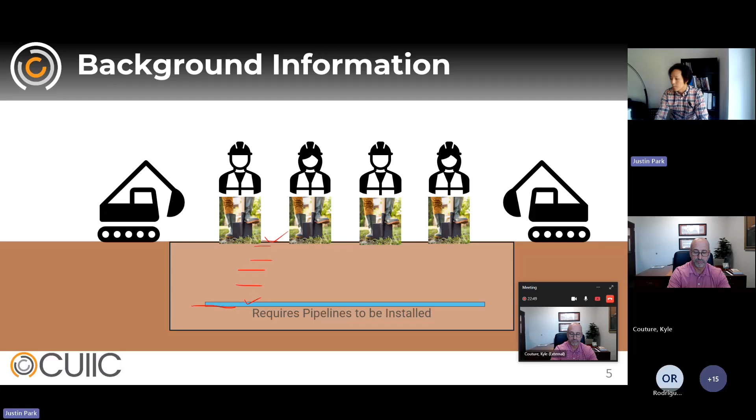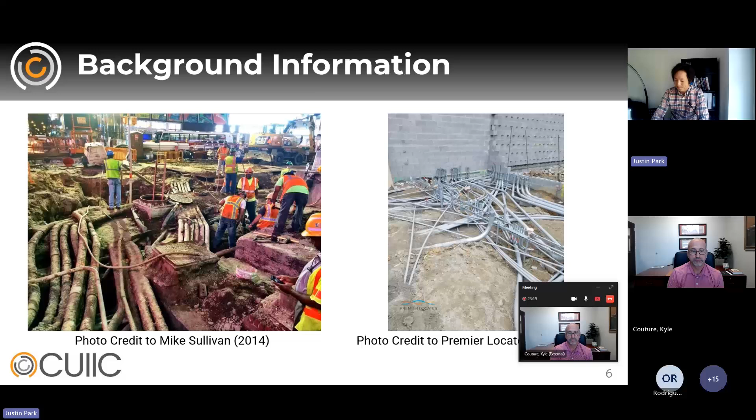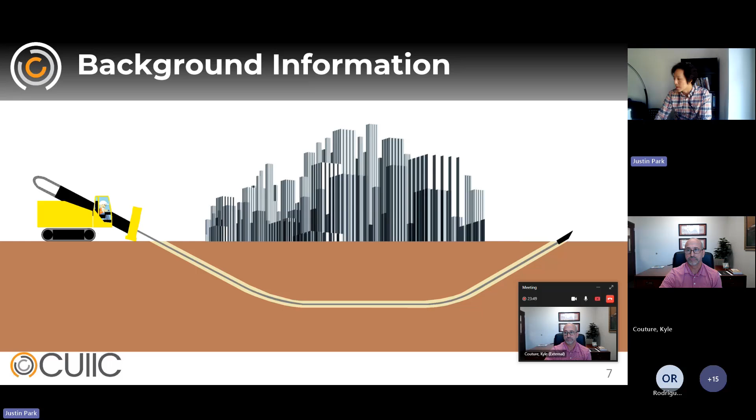So for cases where there are many existing utilities, trenchless options could be good to think about, because instead of making an open cut trench, these trenchless techniques let you drill horizontal boreholes that can be used as an installation path for pipelines. Not only for urban areas, but it's also useful in river crossings, highway crossings, or railway crossings where it's difficult to excavate a trench—trenchless is a good option for many cases.

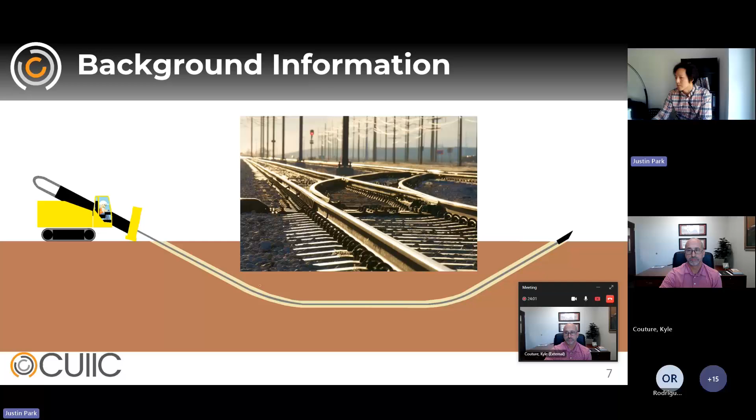I'll talk a bit more about horizontal directional drilling and how it works. The first step, when we spot some surface obstruction, is to determine the entry point and the exit point. Then we put our HDD rig—horizontal directional drilling is often called HDD—and we start drilling our initial borehole.

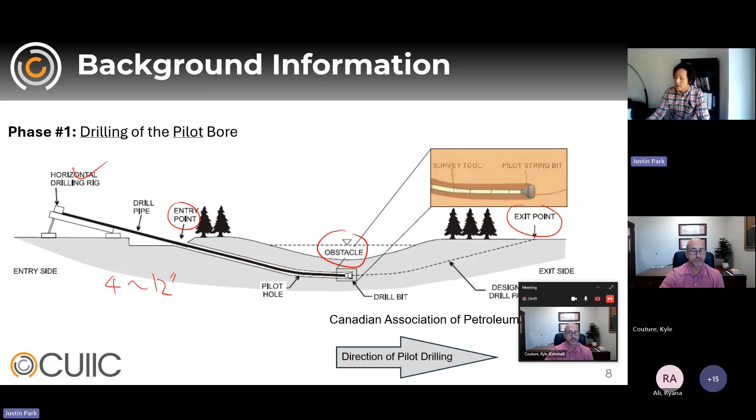It's called a pilot bore. Usually this initial borehole is small, about 4 to 12 inches in diameter. These boreholes are important because they set up the path for further drilling to enlarge the borehole. The direction of drilling starts from the rig, from the entry side toward the exit point. Once the pilot bore is prepared, the next step is enlarging that pilot bore to the final size required for installing our product pipe.

We typically use something called a reamer, also called a hole opener. These are the cutters—they can be attached at the tail string and pulled by the directional drilling rig, or attached to the front of the rig and pushed while reaming. So the direction of reaming can happen both toward the exit and the entry side.

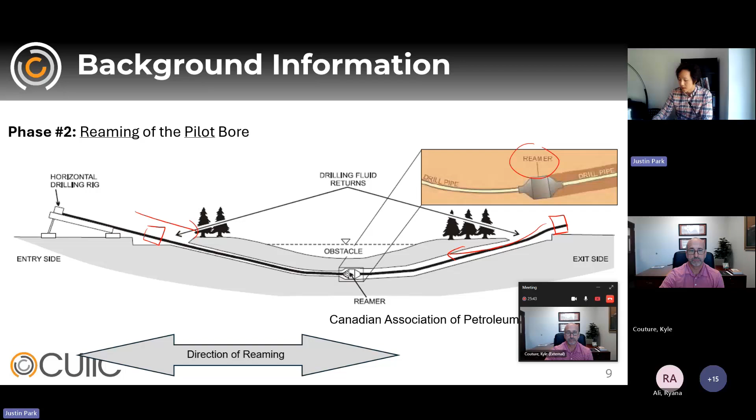Depending on the difference between the final size of the borehole and the initial borehole, these reaming passes can happen multiple times. Lastly, once our final borehole is prepared, we do something called pullback of the product pipe. We attach the product pipe to the drill string and start pulling the product pipe into our borehole.

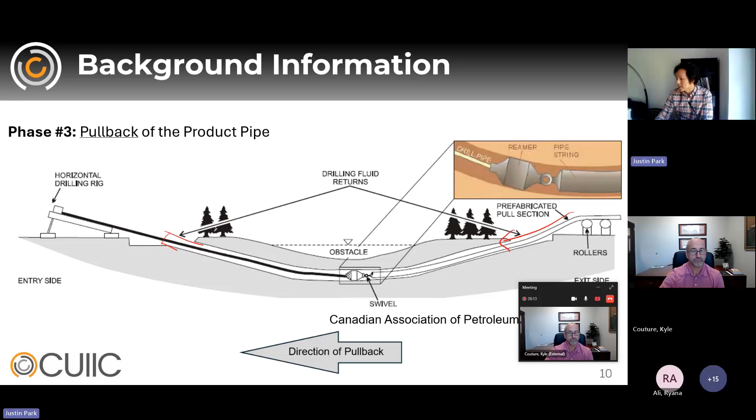When the product pipe reaches all the way to the entry side, the installation is complete. So the direction of the pullback is from the exit side toward the entry side.

When we try to create the borehole, we typically generate something called drill cuttings—the cuttings of earth material that happen due to the activities at the drill end. These are usually required to be removed from the borehole in order to have our installation borehole prepared. To get rid of those drill cuttings, we typically use something called drilling fluid, which is a mixture of water, bentonite, mixed with drill cuttings, and typically some additives depending on the situation.

Those drill fluids are typically filled up with pressure. This pressure is called the annular pressure, because it's the pressure of drilling fluid within the annular space of the HDD borehole. There are two different types of annular pressure: the first one is called the minimum annular pressure required for circulation, often called Pmin.

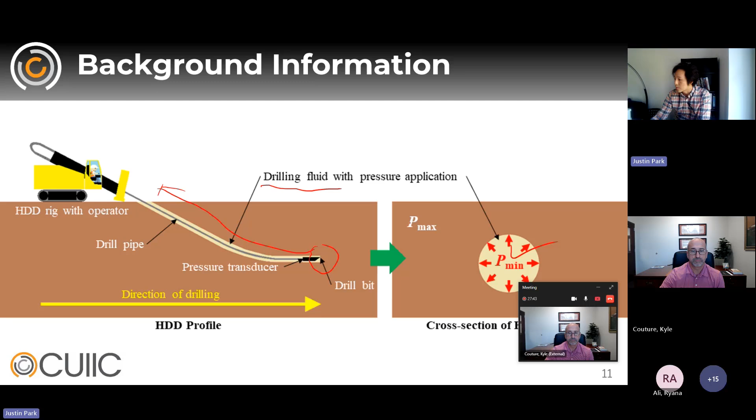The other pressure is called the maximum allowable annular pressure, or formation limit pressure, or simply Pmax. The reason we apply pressure in drilling fluid is because, first of all, we would like to provide some hydraulic power to the downhole mud motor. These pressures are converted mechanically to be able to rotate our drill bit at the drill end.

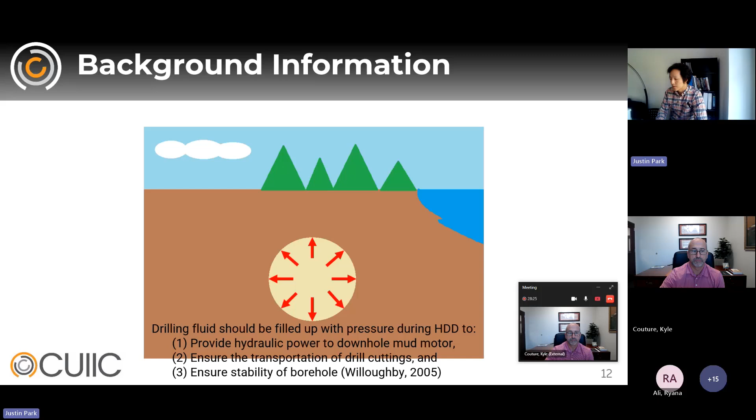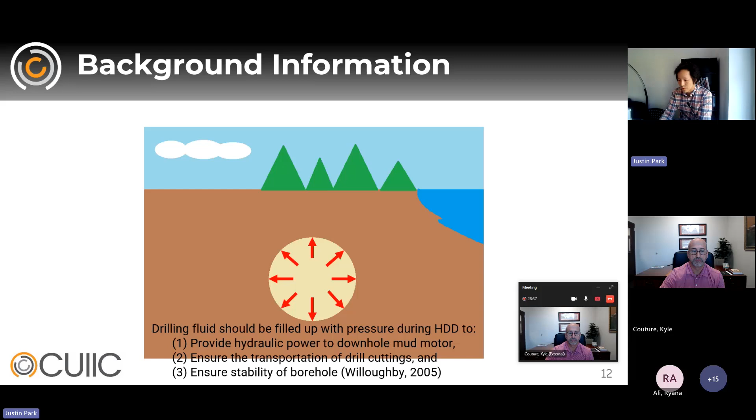The next reason is to ensure the transportation of the drill cuttings, removing them using the pressure of the drill fluid. The last reason is to ensure the stability of the borehole, because we're creating empty space underground. If we do not fill it up and support it, the borehole is likely to collapse. So to prevent that, we need to match at least the in-situ stress of the ground condition. That's why we apply pressure for borehole stability.

This annular pressure increases as we drill further from the entry location. The reason is, imagine we are trying to get rid of drill cuttings near the entry site - the distance it has to overcome is not so much. In comparison, when we have drill cuttings near the end of the borehole, the distance it has to travel is much longer, meaning it has to overcome much more frictional resistance exerted by the wall of the borehole.

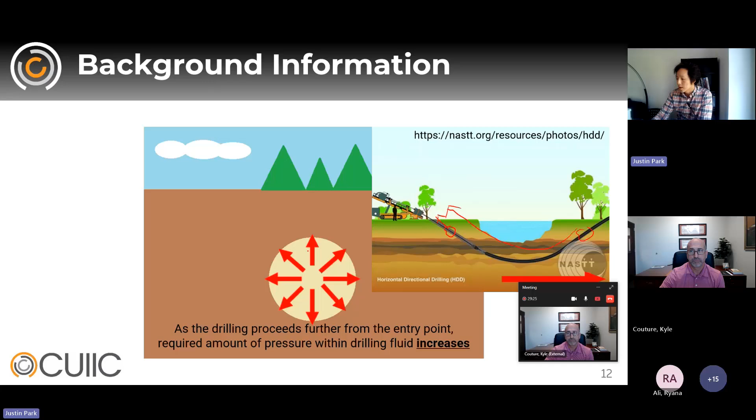When the pressure required for circulation, Pmin, exceeds the maximum capacity of the borehole, Pmax, it is likely that the borehole may fail and hydraulic fracture can occur. That means the drilling fluid inside the borehole can no longer be contained within it, so it will start escaping toward the surrounding environment, or it can reach all the way to the surface.

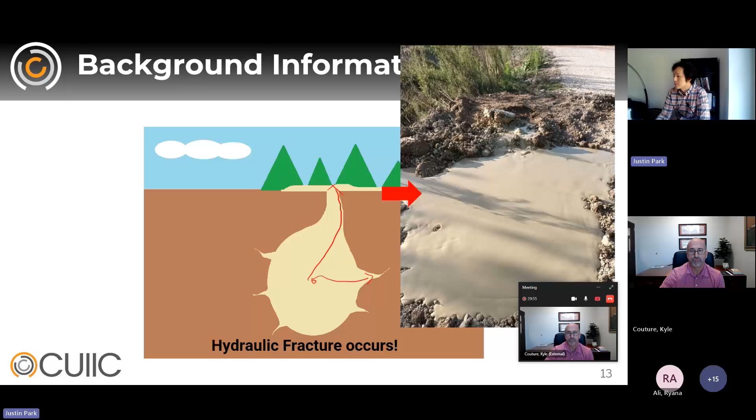Here's an example photo of drill fluid found at the surface. If that happens in the roadway, it's quite problematic because incoming traffic safety could be endangered, since this drill fluid is a slippery material and can cause vehicular accidents. In that case, it needs immediate cleanup, and frictional material like sand must be applied to make the road safer.

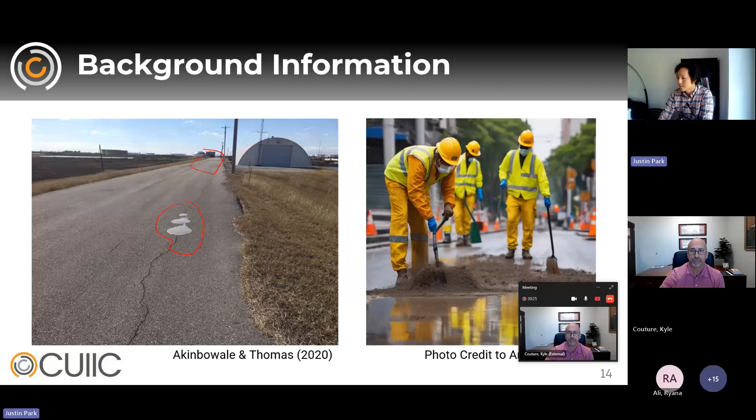And if that happens in urban settings, the pressure applied toward the surface can actually uplift the surface structure and damage what's on top of it.

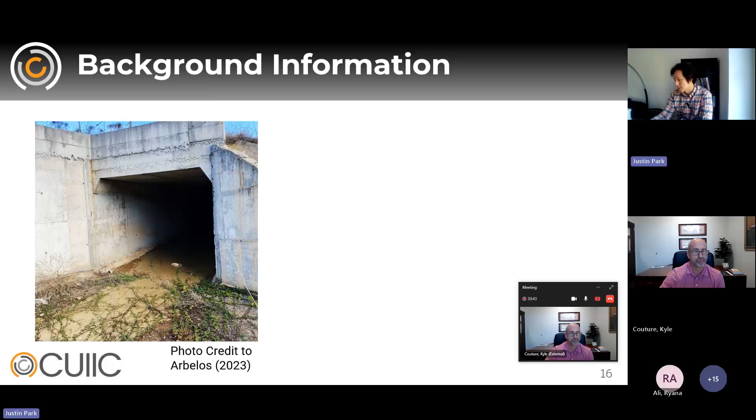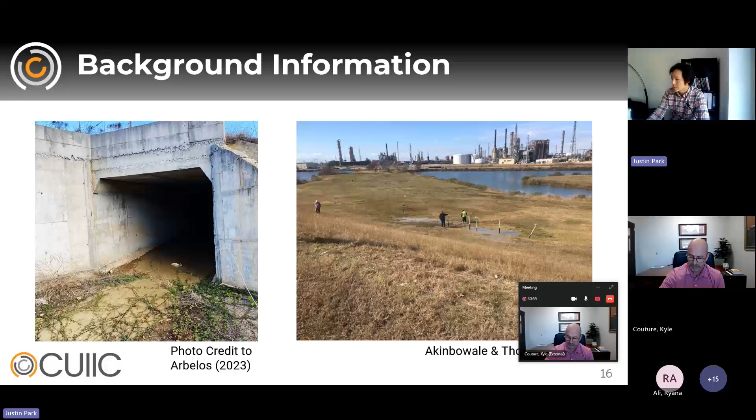If that happens near culverts or creeks, you can see the drill fluid contaminating the water. And if it happens near important infrastructure, like embankments, dams, and levees for flood control, the regulators may not be very happy about it.

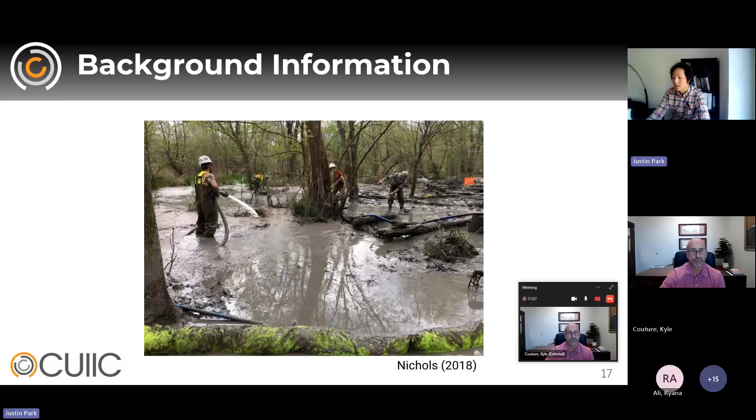And if this happens in environmentally sensitive areas like wetlands, as you can see, it creates a lot of mess, and the remediation is going to be time-consuming and costly.

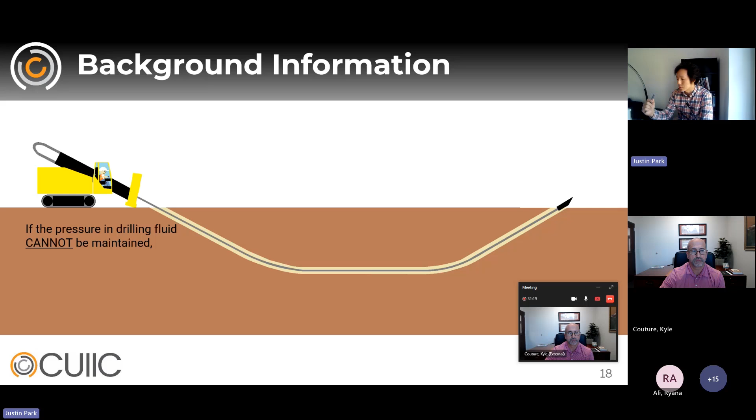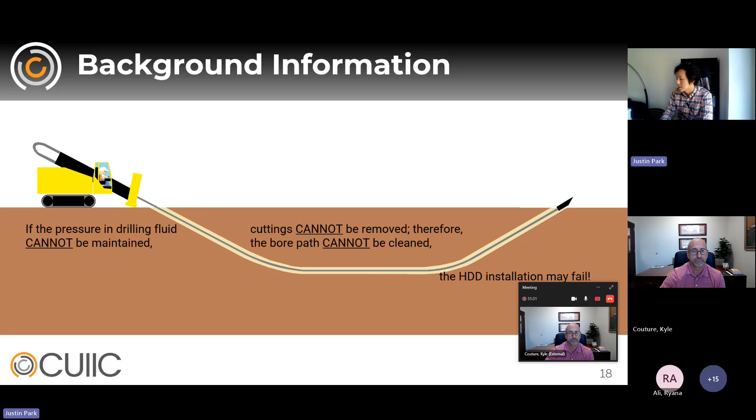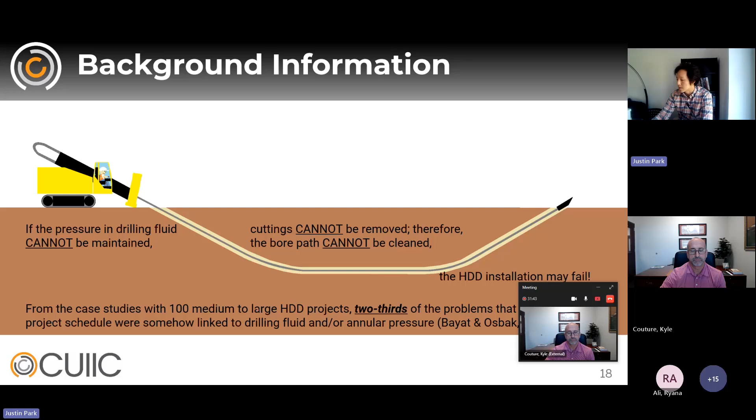Not only is this adverse for the environment, but if the drill fluid cannot be contained within the borehole, we may get into a whole cleaning issue. When we try to pull our product pipe into an uncleaned borehole, there's a high chance the HDD installation could fail. From our case study of 100 HDD projects, we found about two-thirds of scheduled delays are somehow related to either drilling fluid or annular pressure. So it is critically important that we have proper management of drilling fluid pressure during HDD.

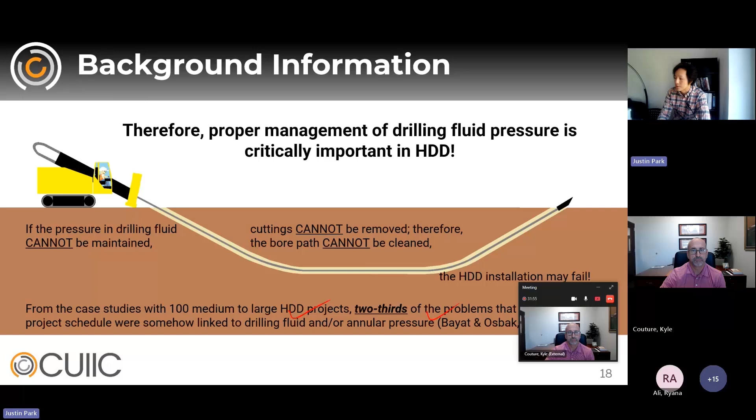According to ASCE's MOP 108, which discusses HDD design, the risk of inadvertent return, or IR, could be increased by the following conditions. It's called inadvertent return because when the frac-out happens, the drill fluid is not returned to either the entry pit or the exit pit as we want - there's some kind of inadvertent return happening, and that's what this type of risk is called.

I grouped the listed items together. The first group is related to ground condition. When there's a very loose or soft formation existing, meaning the ground adjacent to the HDD borehole is too weak, it's easy to cause the frac-out.

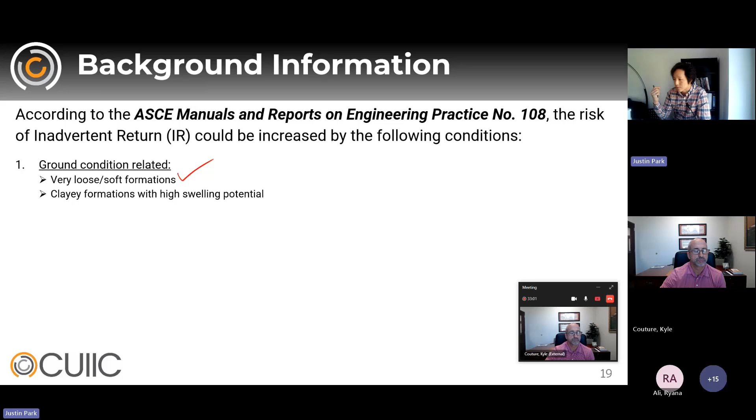If there's clay formation with high swelling potential, that means the clay is quite sensitive to moisture, so when water or drilling fluid is introduced to it, it's easy to expand. That means if we have a borehole like this, it can actually expand and make the annular space much smaller, which can cause either borehole squeezing or hydrolocking. With the reduced area, it's easy to spike the annular pressure, making it easy to frac out.

And if there's ground condition that is highly permeable due to various reasons - like granular soil with large openings, or bedrock with fractures, or any type of piles, foundations, or existing utilities which provide a preferential flow path - then it's easy for the drill fluid to flow into those locations and be lost.

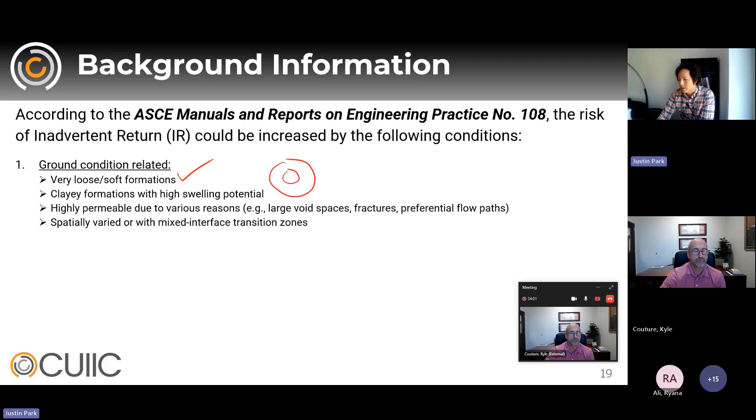If there's some spatially varied condition or mixed interface transition zones, it's easy to have the drill fluid flow into the transition zone. Because it's spatially varied, the strength and resistance of the ground may vary, so it's difficult to maintain consistent annular pressure. That's going to be problematic when we try to prevent a frac out.

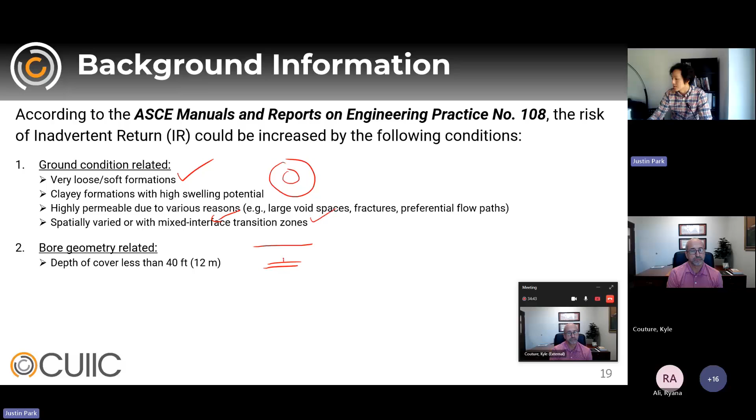Another group is related to bore geometry. One example is when we do not have sufficient cover above the borehole to provide confinement, so it's easy to cause a frac out. Another one is when we have considerable elevation difference. When we're drilling from uphill and reach all the way downhill, because the hydrostatic pressure is pretty high, we're going to utilize high annular pressure easily. Then it's also easy to frac out.

The other group is related to construction itself. When we use inappropriate downhole tooling or drilling practices - let's say our drilling is not very efficient with the tooling we selected, or if we're going too fast, or utilizing way too high pressure - then those are situations where it's easier to frac out as well.

When the circulation of drill fluid is being lost or severely diminished - so at the entry or exit pit, when we do not see the return of the drilling fluid - that means there's an important sign there could be some kind of IR happening somewhere that we didn't spot yet.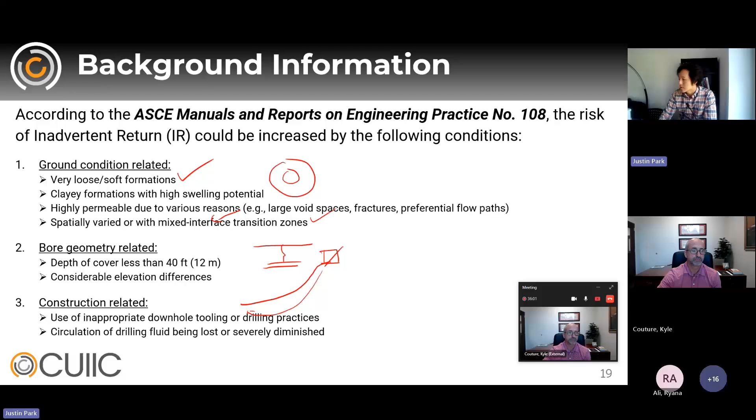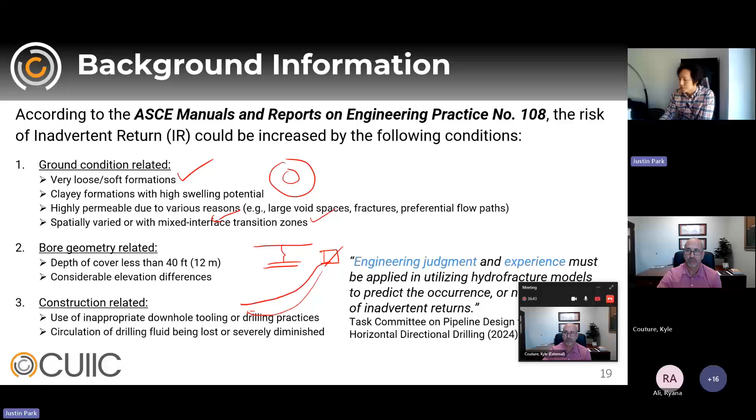So in order to prevent this type of risk, we conduct something called hydraulic fracture analysis. Related to that, ASCE-MOP specifies that engineering judgments and experience must be applied in utilizing hydrofracture models to predict the occurrence and non-occurrence of inadvertent returns. It doesn't specify too much about which model and method we have to select, and I believe it's because depending on which region, the type of soil is different and the model could vary. So it kind of asks us to make sure we have sufficient experience to make good engineering judgment.

And Justin, let me interrupt you for a second on that. A question I have - it seems that IR is very dependent on your Pmin and your Pmax. When are those values typically known in an HDD?

So Pmin and Pmax, we can both determine from the design phase - that is the design parameter. What we also have to confirm is how it works at the construction stage, right? So we have measurements, we can see if our pressure is matching the Pmin. Those Pmin, Pmax - usually Pmin can be assumed with some drill fluid properties, those rheological parameters. It could be dependent on who's constructing it as well, but from design we can predict based on what the formation is like and what the effective hole cleaning parameters we can utilize. And for Pmax, we get it based on the geotechnical information we collect at the design stage.

Okay, then I will continue my presentation. So in order to conduct the hydraulic fracture analysis, typically what we do is the method suggested by Bennett and Wallin in 2008. They introduced this method in Pipeline Conference. The basic idea is creating four different curves along the HDD bore path.

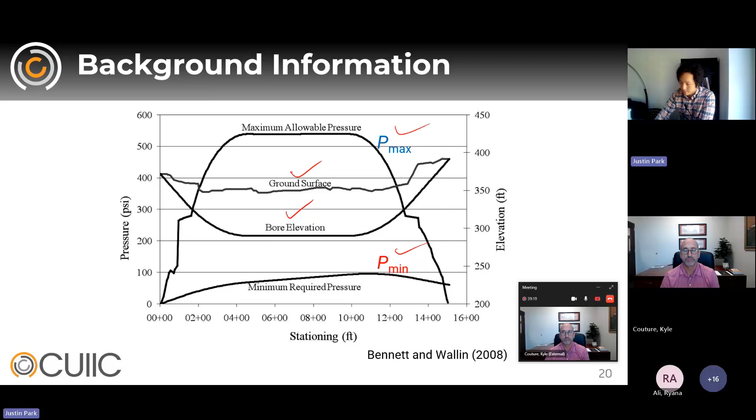And here's the problem that I found during my study related to this method. This method is very useful, but in my opinion, I think the method is a little bit too deterministic rather than sufficiently considering all the uncertainties related to underground drilling.

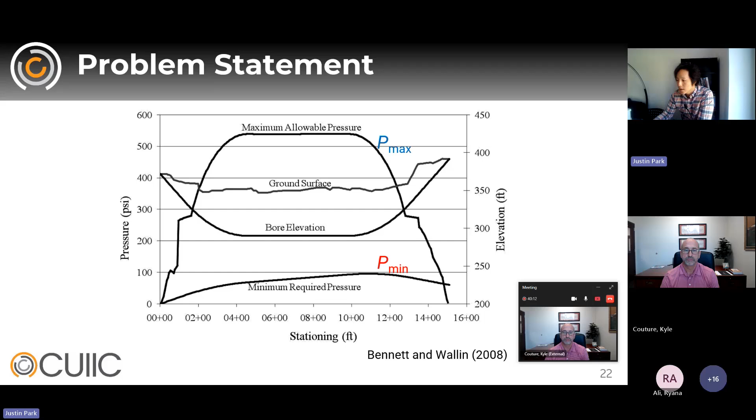To make it easier, let's imagine an HDD bore path that crosses various ground material. That means we may encounter material with different properties, and that means we might have to consider a different recipe for drilling fluid, and we might have to use different toolings as well. And while there are so many uncertainties existing, I am not sure if the current way of conducting hydraulic fracture analysis can take everything into account.

And talking about uncertainty, according to Dr. Morgenstern at the U of A, there are multiple sources of uncertainties in geotechnical engineering.

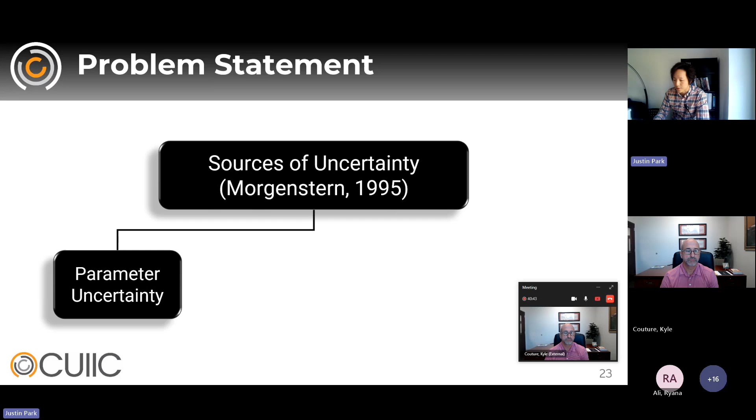The first one is called parameter uncertainty. When we have a mathematical model to predict something, we need some input parameters. Depending on if the parameters have some error, it can actually cause error in the results of the analysis as well. So this is called parameter uncertainty.

The next one is called model uncertainty. So those mathematical models we use, if they deviate from the real phenomenon, it can also cause error in the analysis. That is called model uncertainty.

Another one is called human uncertainty. Dr. Morgenstern recently mentioned this is also called human ignorance. Depending on who's practicing it, the level of knowledge and experience can be different, and that's related to what ASCE MOP was describing. We need sufficient experience to have better engineering judgment. If those judgments are not adequate because of lack of experience and knowledge, that can be another source of error, which is human uncertainty.

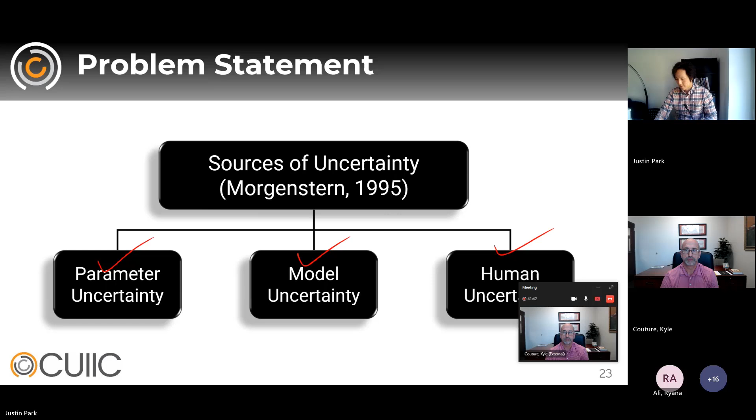Now let's talk about each uncertainty in a little bit more detail related to HDD. For now, we're going to talk about model uncertainty first.

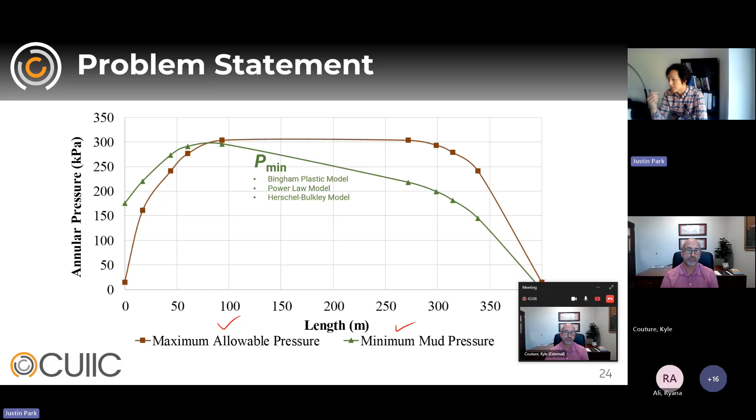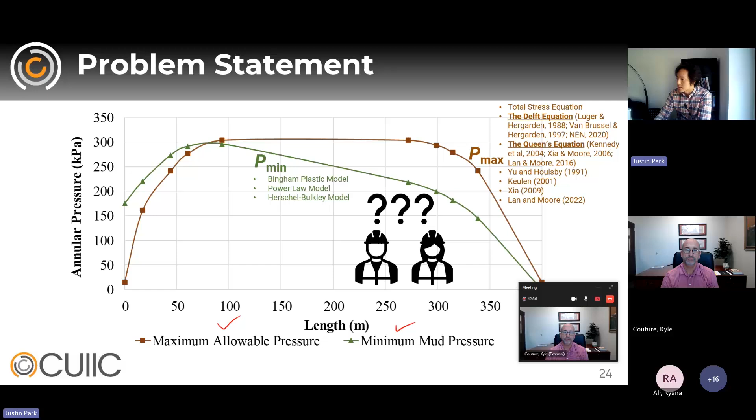When we conduct hydraulic fracture analysis and need to predict Pmin and Pmax, for Pmin we have multiple models available to predict. In comparison, for Pmax we really have many models available in the literature. I went through all of them, and I think each of them make their own sense. But at the current stage, there's not enough data in the literature to say which one works superior to another in which situation. From a designer's perspective, it's actually quite confusing.

Now let's talk about model uncertainty—I mean, the parameter uncertainty.

When you conduct the hydraulic fracture analysis, you need to obtain some geotechnical parameters, such as stress state parameters related to unit weight and lateral earth pressure coefficient. You also need strength-related parameters such as cohesion, internal friction angle, and undrained shear strength. And you also need stiffness-related parameters such as modulus of elasticity, shear modulus, and Poisson's ratio.

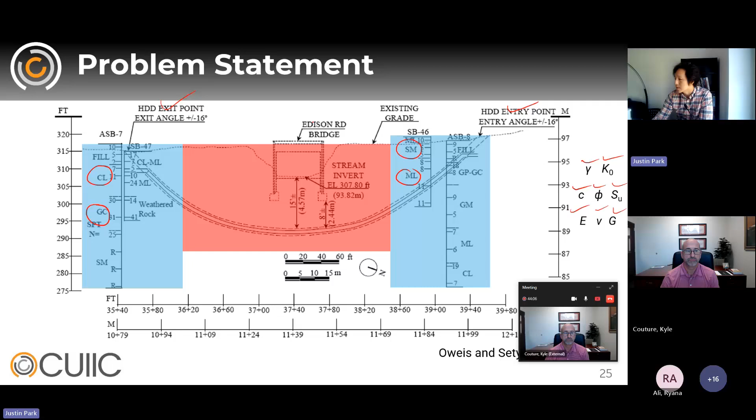How we determine them is we base them on geotechnical exploratory boreholes. One interesting thing here is you can see those geotechnical boreholes are kind of congested near the entry and exit sites, and there's not much going on in the middle. I'm thinking the reason is because there's a bridge right there, so it was more difficult to have geotechnical boreholes nearby. I'm thinking that could be the reason they decided to go for trenchless as well.

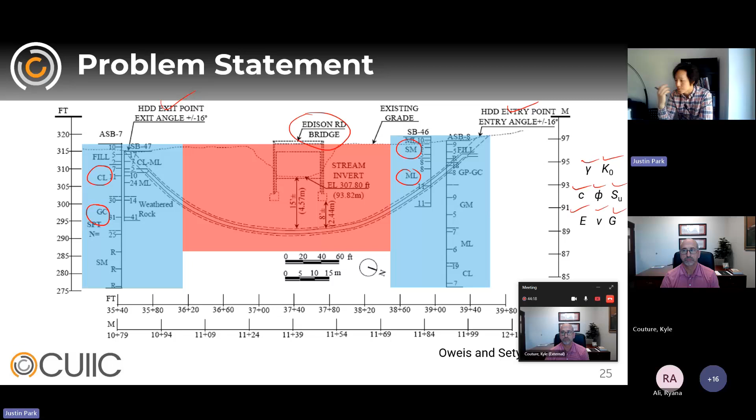But one fact that doesn't change is near the geotechnical boreholes, we're more certain about the geotechnical parameters. But when we get further from those boreholes, we will be less certain about it. So there are many uncertainties existing in geotechnical engineering like this.

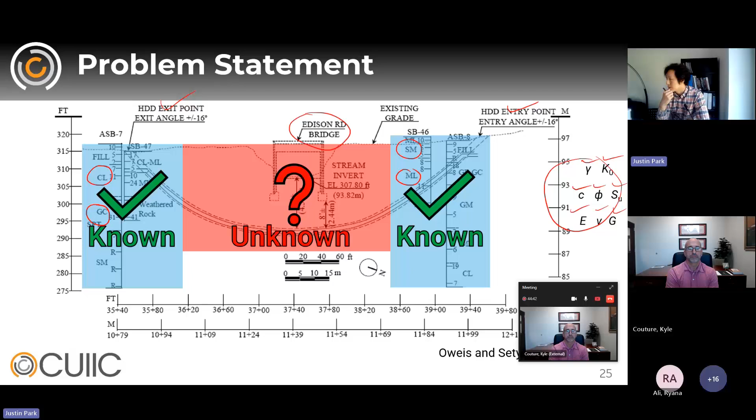In order to deal with those uncertainties, typically we consider something called a probabilistic method. In the next portion, I will show you what the probabilistic method is being used in other geotechnical disciplines—for example, here is the slope stability analysis.

Yes, that's one way—that's what a lot of practitioners I see from literature like to do. They don't want to have a parameter that's unconservative. So usually how they do it is they either have direct measurements or they can also have empirical determination, based on experience with that soil, from a range of values they can select. It is common practice to try to be conservative, but as I mentioned, it's based on judgment. It's not like structural design, where there's a code and a certain value you have to use in a fixed procedure. It's more up to us to decide, and it will also depend on who's deciding that. There could be some debate between what parameter and what magnitude they want to choose.

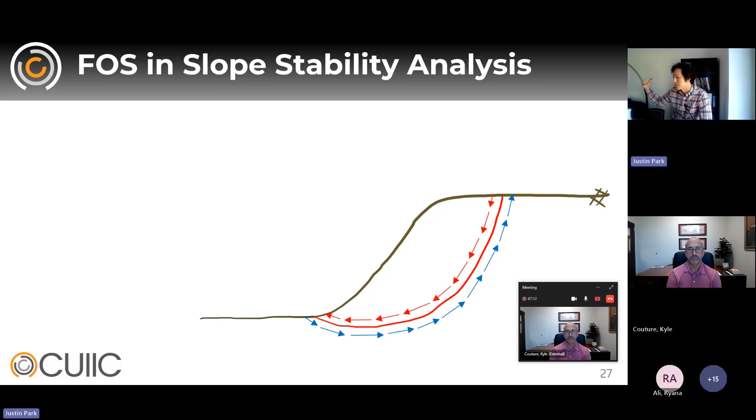What we usually do is assume a failure surface, and there are two different types of forces acting on it. One is the force exerted by the sliding mass trying to slide down toward the downslope, and another is the force resisted by the other side of the ground, which is trying to hold up the sliding mass. The factor of safety is the comparison between these two forces.

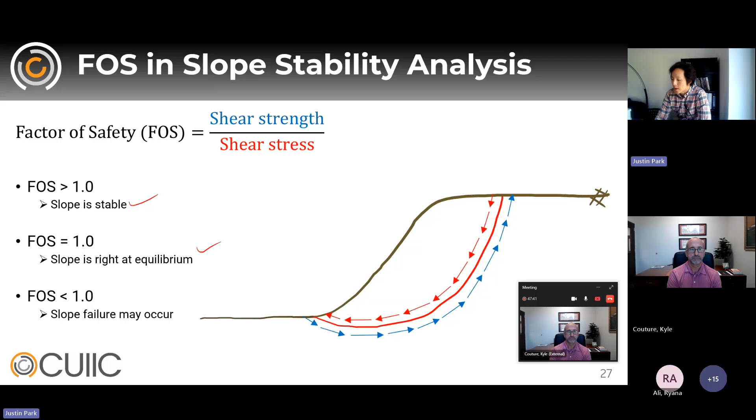If the factor of safety is greater than 1, the slope is considered stable. If the factor of safety is equal to 1, the slope may be considered right at the edge of failure. And if the factor of safety is less than 1, the slope has a high chance of failure.

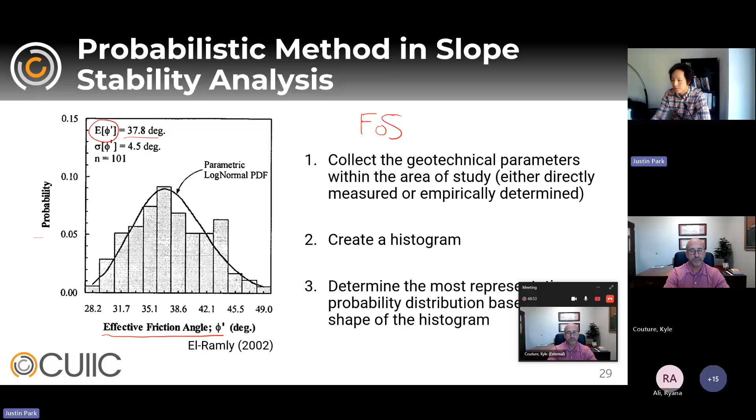So the first thing we will do is create a histogram like this, and we will determine the most representative probability distribution function, so it can actually represent the shape of the histogram. We would like to consider the entire data for further analysis. In this case, they chose a log normal function.

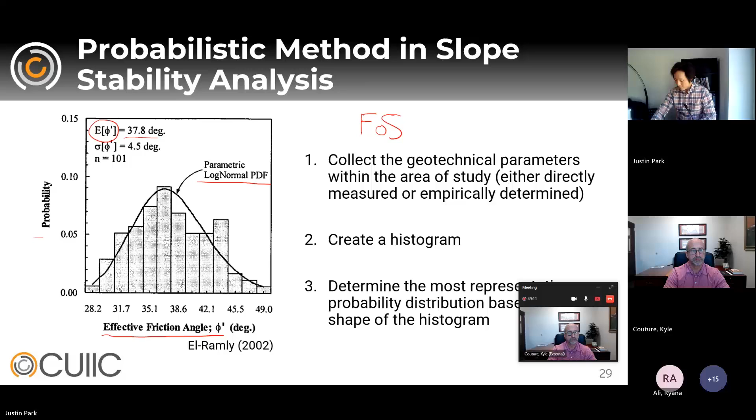The next step is to carry on those input distributions and then apply them to models. Models can be either analytical or numerical. Those are kind of like limit equilibrium equations, like a hand calculation, and the other one is kind of like software using the finite element method or discrete element method.

The next step they will do is handle the model uncertainty. The first group is about considering partial factors for input parameters. Depending on the sensitivity of parameters, they can consider different magnitudes for those partial factors. Another way is, depending on the tendency of the model to either under predict or over predict, they can choose a global model and consider a correction factor for each case.

Once the model and the parameters are determined, what they can do is something called integration. The basic idea is repeating the calculation of factor of safety while varying the input parameters randomly. It's random, but not entirely random, because you will still follow the input distribution curves. And as a result...

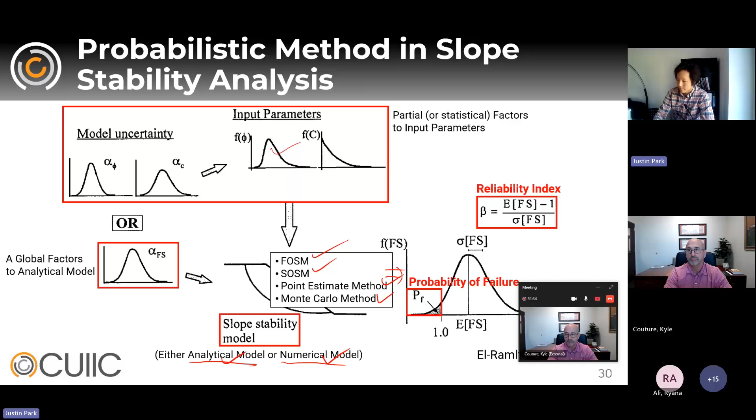Another index often used is called the reliability index. So this is a brief concept of how they determine the probability of failure in this type of geotechnical practice. Now I will relate that to our HDD.

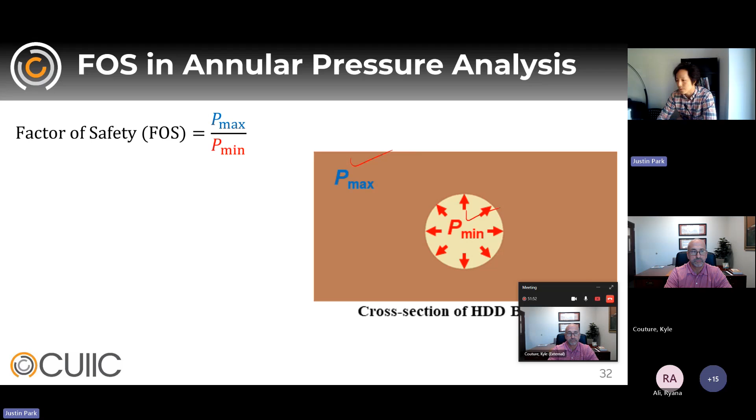Coming back to HDD, we have two different types of annular pressure as well, which is Pmin and Pmax. So there's no reason we can't do something similar. The factor of safety will be the ratio between Pmax and Pmin.

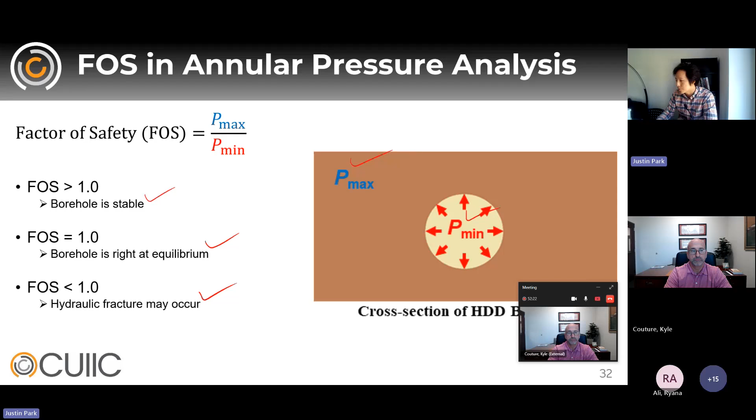If the factor of safety is greater than 1, the borehole is likely to be stable. If the factor of safety is equal to 1, the borehole may be at the edge of failure. And if the factor of safety is less than 1, the borehole may fail and hydraulic fracture can occur. So there's no reason we can't apply a similar probabilistic approach, and I'm going to show you more details in a further section using a case study.

For a bit of time, let's talk about the consequence of failure and risk evaluation. For consequence of failure, let's say there's a slope failure, and then multiple things get affected, which is called PEAP — standing for people, environment, asset, and production.

When the slope fails and there's people living nearby, it can endanger the safety of people's lives. And if the large ground mass slides down and changes the topography, it will affect the environment. Also, if there's houses or infrastructure near those slopes, it can adversely damage the assets.

And if that's the case of a mining operation, let's say there's open pit mining with workbenches that fail, or if that's the case of tailing dams failing, then it's going to affect the mining operation and its production.

And for a case of HDD, if blowout happens, it also affects multiple things. We had the example if it happens in the roadway and the drill fluid is released to the surface, it can endanger the driver's safety. If that happens and releases the drilling fluid to a sensitive environment, then that's going to cause an environmental issue. And you can see the surface structure could be damaged, so it's an asset problem as well. And we saw that hole cleaning can be affected, which can actually affect the production rate of the pipe installation as well.

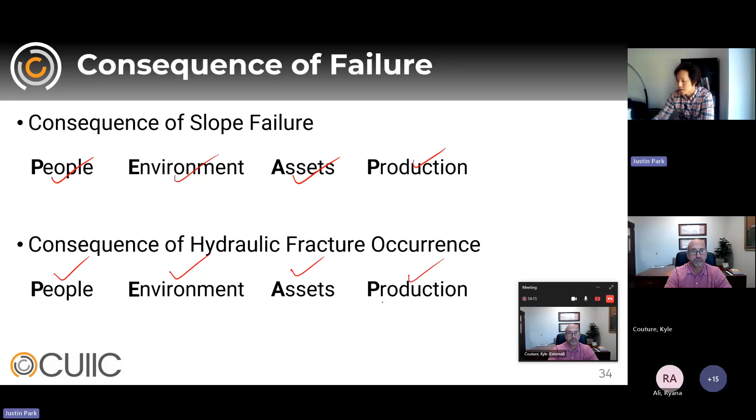So once the probability and consequence are determined, what we can do is something called risk evaluation based on predetermined risk criteria. Where the probability and consequence are both low, that is considered low risk. Where the probability and consequence are both high, that is considered high risk. And there will be a maximum envelope of how much risk they can take. So before that point, it's going to be acceptable risk, and beyond that, it's going to be unacceptable.

And depending on who's taking that risk, the envelope can vary because everybody has different tastes of risk.

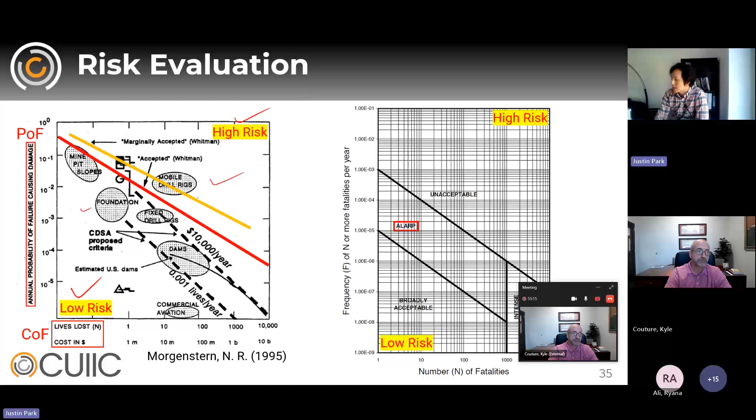Another important term I would like to highlight is called ALARP, which is as low as reasonably practicable. So I'm thinking for HDD and hydraulic fracture, we also need an envelope that is reasonable and practicable for our HDD design.

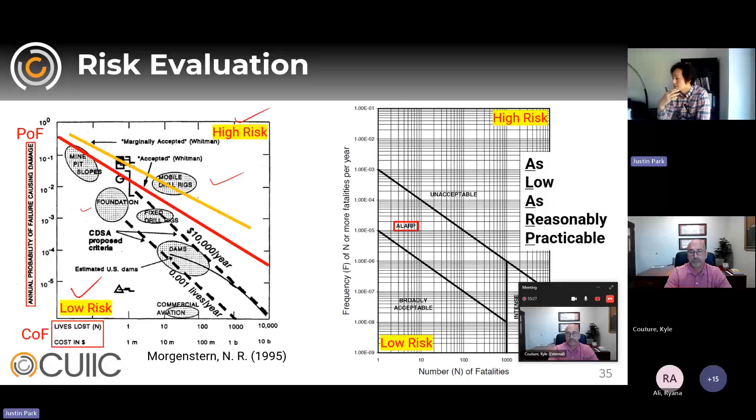Now let's move on to a case study with a virtual HDD bore path within decomposed bedrock. For those of you who aren't familiar with what decomposed bedrock is, it's a kind of weathered bedrock. It could be either fully decomposed into a clay material, or it could be just slightly fractured, or heavily fractured. So in this type of material, spatial variation could be expected.

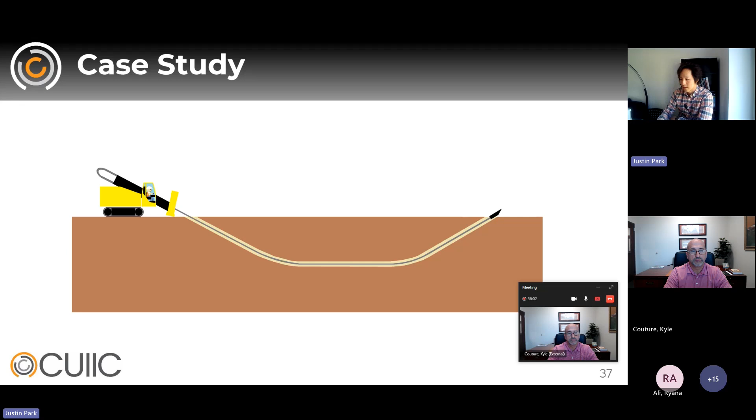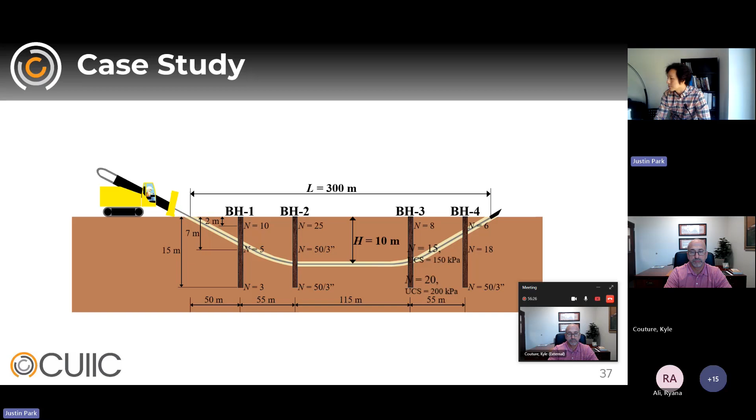Let's say the HDD bore path is 300 meters long and 10 meters deep. We can imagine that the HDD bore path is designed based on geotechnical boreholes. Here are the locations of them, and let's say they have some in situ test measurements like SPT or laboratory tests like UCS. Here are the points of interest for further analysis.

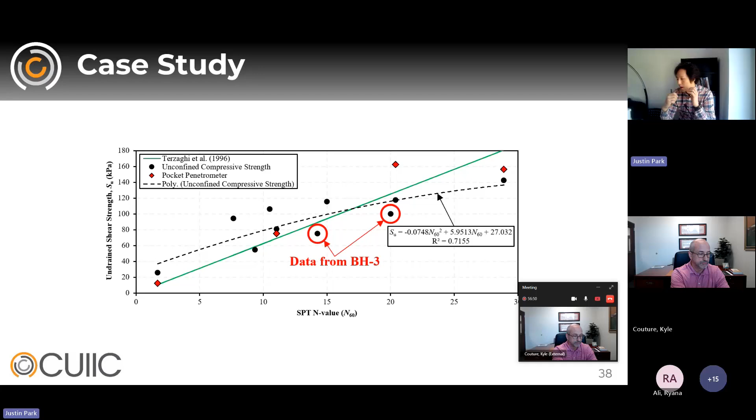And this is the geotechnical information that I use for this analysis. As you can see, only 2 points are directly related to that HDD, but it is typical to utilize a larger group of data from the entire pipeline project to have a better understanding of the material.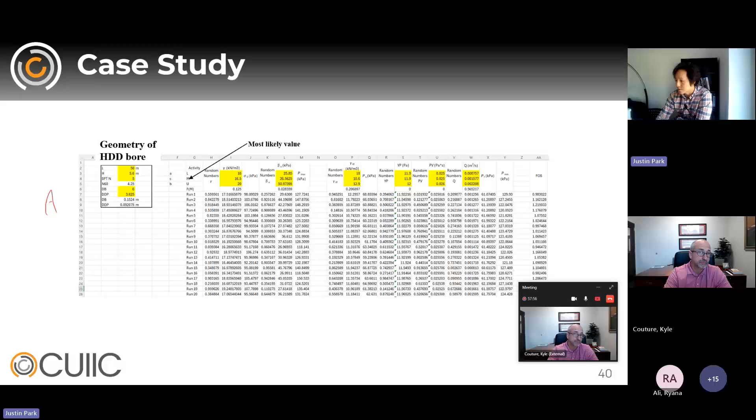So the first setting here is the geometry of the borehole that I inputted. There are 3 critical points that I considered for input parameters, because for all the input parameters I consider the triangular distribution for simplicity in explaining the concept. Those 3 critical points include the most likely value, lowest possible value, and highest possible value. This Fm is the shape function, showing the skewness of this distribution.

For those of you who think you have a better idea of which distribution to use, such as log normal like in the previous example, later you can try with those types of distributions. But for now here I consider the triangular distributions for all the input parameters. I use the RAND command in Excel, which generates random variables between 0 and 1. Here are the mathematical functions showing how I utilize this random command to randomly generate the input parameters. Those input parameters include unit weight of ground material, undrained shear strength - from which I was able to get Pmax - and the unit weight of drilling fluid, yield point, plastic viscosity, and flow rate, from which I was able to calculate Pmin.

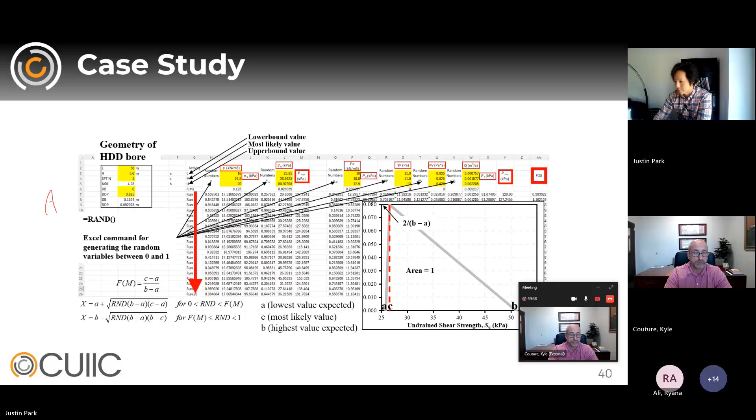For position A, Pmin and Pmax were very close, and we get about 17% probability of failure. For position B, where Pmax was much higher, the probability of failure is 0. For position C and D, where Pmin was much higher than Pmax, the probability of failure is 100%. So that is how you get the probability of failure.

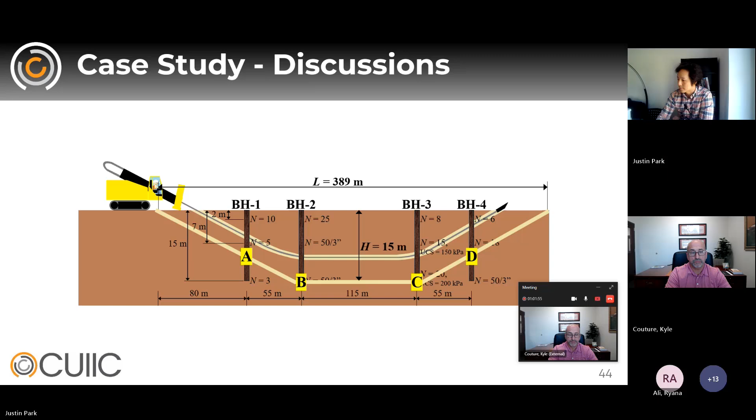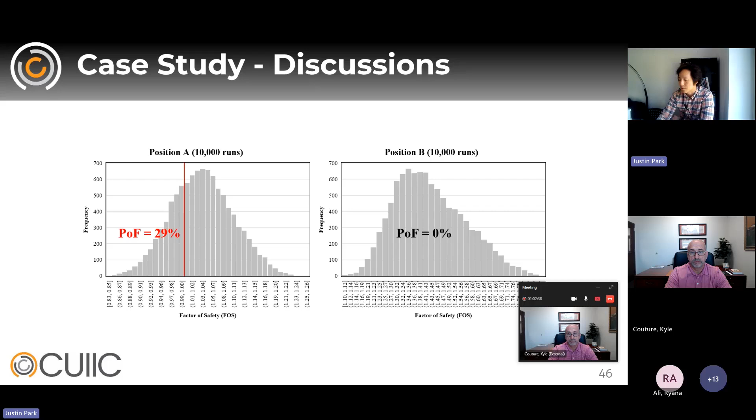If we conclude our analysis here, we would think the probability of failure at position A has been lowered. But when we conducted probabilistic analysis, that actually wasn't the case. The probability of failure increased to 29%, while the previous shallower bore path was 17%.

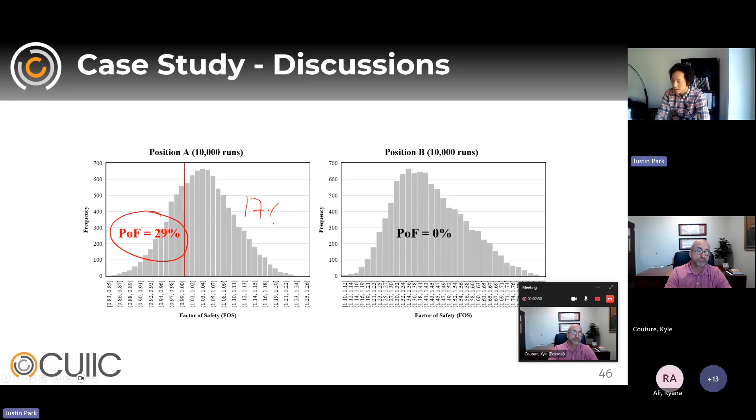That's because our soil strength distribution became wider. When we deepened the bore path, we got closer to a weaker strata, while still closer to stronger material, but there was an increased chance of having weaker material. That wider range contributed to the increase in probability of failure, which could not be captured by the traditional hydraulic fracture analysis.

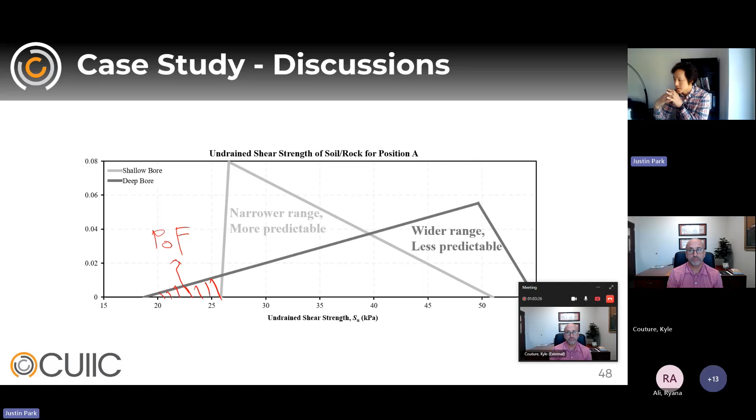I'm not trying to say we don't have to conduct the existing traditional hydraulic fracture analysis. What I'd like to emphasize is we're just introducing one more parameter, called probability of failure, which shows the influence of uncertainties within the input parameters.

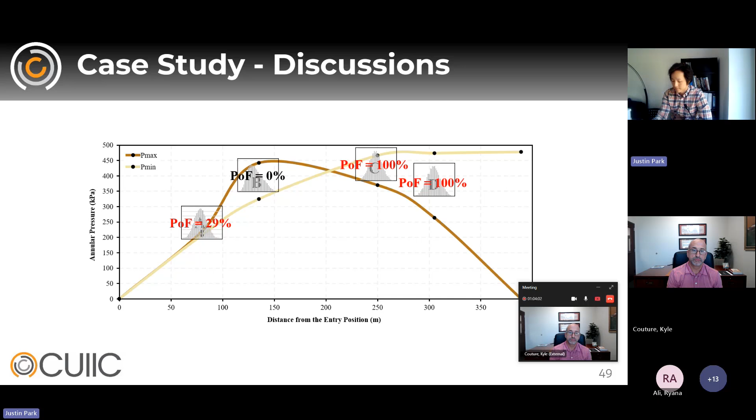I think this additional insight is useful when determining HDD alignment. In the future, I'd like to apply this concept to real HDD case studies, and also learn the real consequence of hydraulic fracture based on previous records. I want to determine threshold values for probability and consequence of hydraulic fracture, which govern the feasibility of HDD construction, and lastly, establish risk criteria particularly for hydraulic fracture.